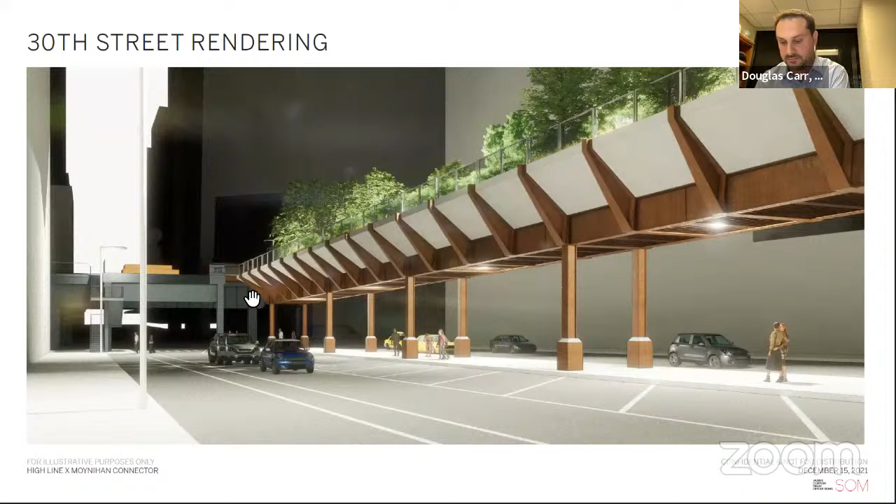So the next slide, some of this was the concern to address the greenery. As I mentioned previously, I think physical limitations, the idea of trees was discussed, but given the utilities in the subsurface, the low canopy on the elevated walkway surface, and the lack of light, this area will not support lush mature plantings.

So we started to pivot to another direction to see what could we include, something that was a flexible solution that would enhance the experience along here and also provide a level of flexibility as this connection and the street level experience evolves over time, to also include future improvements connected with the Port Authority bus terminal improvements and renovations, which will have an impact on the existing curb that we will have in day one.

So the solution we've come up with is planters. We also understood that there was a request and a general programmatic initiative for integrated lighting and something to give it an architectural perspective. So we specifically looked at planters with integrated lighting solutions.

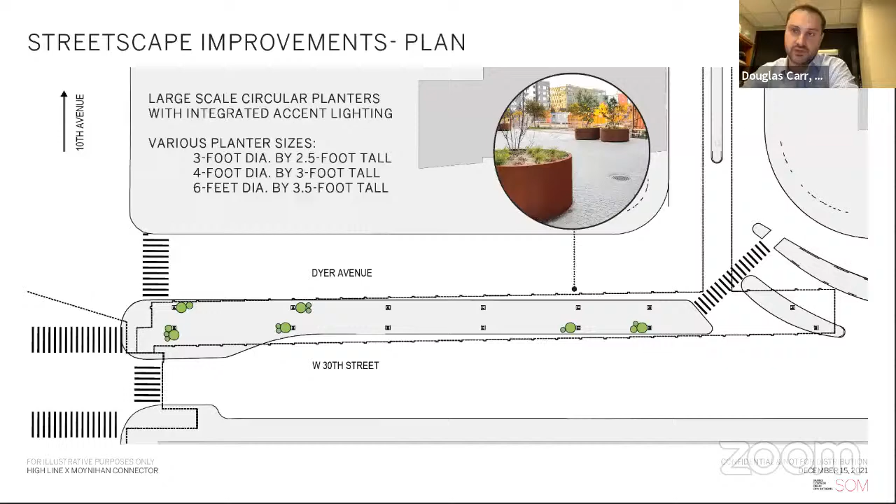And if you can switch to the next slide, the day 2 condition. So as we are planning, we also understood from the Port Authority their day 2 improvements for their Port Authority land. The connector, as a reminder, is being built on and over Port Authority land. So we have done this in a way that's compatible with current iterations of the Port Authority reconfiguration to support the Port Authority bus terminal.

So I think importantly, this solution is flexible enough that these planters can move if and as necessary with the future reconfiguration of the Port Authority layouts and design.

We can go to the next slide. A little bit more in terms of the options. So we've gotten as far as speccing certain information regarding the planters and vetting the vendors, fabricators, and quality of these planters. As I mentioned, they can come in various materials. They will also come available with an integrated water tank to minimize effort and maintenance for these planters.

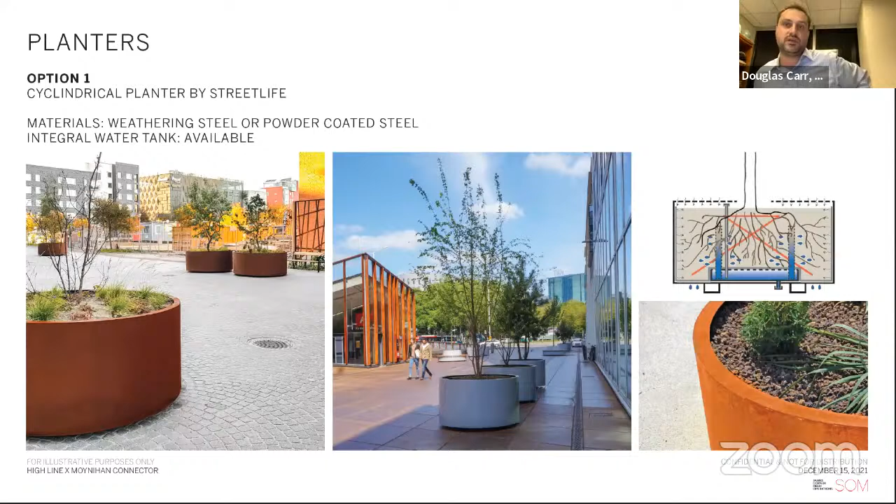And then we can go to option 2, next slide. These are still using steel, different material, different treatment for a visual aspect, but regardless of which version we go with, we have looked into an integrated water tank which would make the overall plant maintenance more manageable. Next slide.

This is a little bit more on the lighting and some of the options. On the left, option 1 you can see is integrated at the rim. There are options where we can incorporate uplighting into some of the plantings, and option 2 has LED strips at the bottom of the rims and inclusive of uplighting in the planters as well.

I believe that is our final slide. So we're happy to entertain any questions or comments or any discussion.

Yeah, I'll take care of that. Members of the committee, what's... David has his hand up.

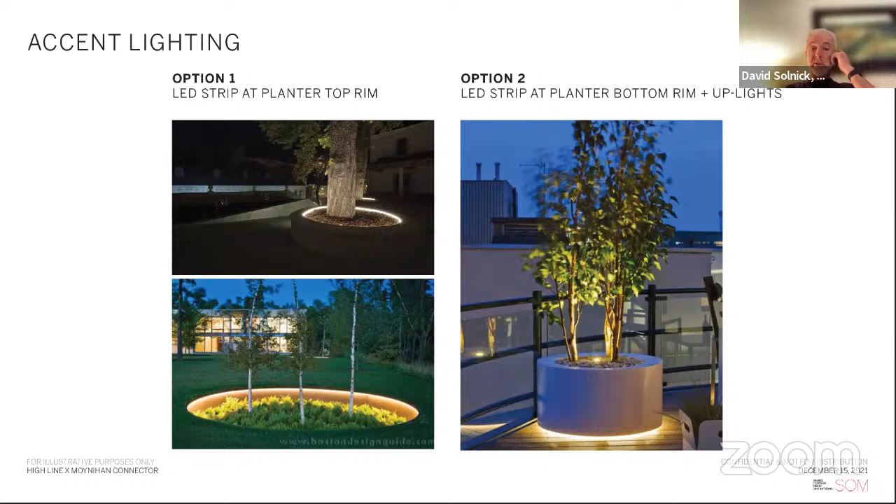My first reaction is these look like some great options, but I'm not sure what options... I don't really know how to evaluate it because I don't know what options you're going to choose, or how many of the planters are going to actually have this lighting or that. You've just given us a list of possibilities, but I think we're looking for a design to know what you're actually going to do.

Understood, that's where we're at, David, in terms of our design. I'm not sure if there's a specific question in there. Is it which option do we prefer, or do all of them come with lighting? I think the answer to both of those is yes, all of them can be integrated with lighting. I think we are deciding as a project team, probably leaning towards an architectural similarity on the weathering steel and the Corten option, but we wanted to convey that there is optionality.

I think the upper is all Corten steel, so it'd be fine to have it be Corten steel, but are you planning all of those? Will all of the planters have lighting in them? Yes, that is our intention. Okay.

Anyone else? Okay, I have a fair amount of questions. Could you go back to the beginning, show the beginning again? Yeah, and show the next one, next.

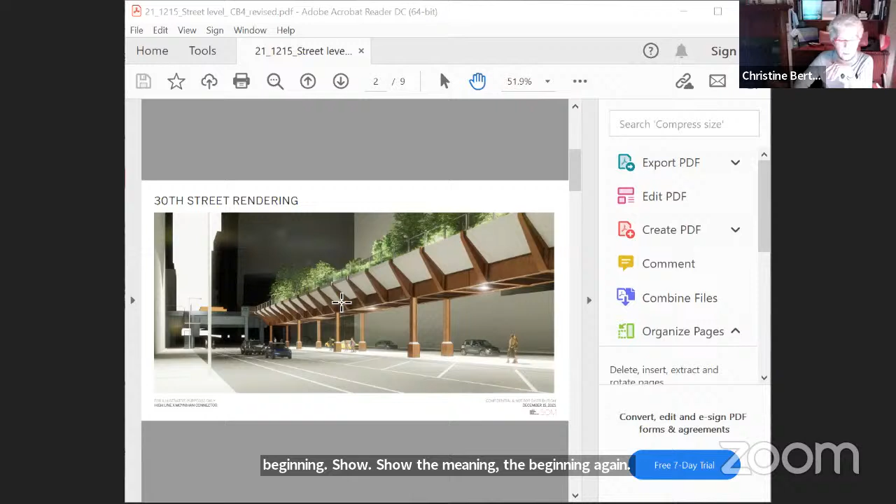Okay, so the first thing you said is we have to take into account the traffic needs for the lighting. So bottom line, what I'm saying is that the lighting issue has not been addressed to my understanding. There is no traffic need for lighting because today you have lights on that segment on both sides, on Dyer Avenue and on 30th Street, which is satisfactory.

And then for Dyer, they are going to be on the north sidewalk. What these lights are doing is providing the DOT specified fixtures. We spent a lot of time coordinating. But we don't need the DOT for that because there is not a requirement. We do need that, it's a pedestrian walkway. No, it's providing street lighting on the north and the south.

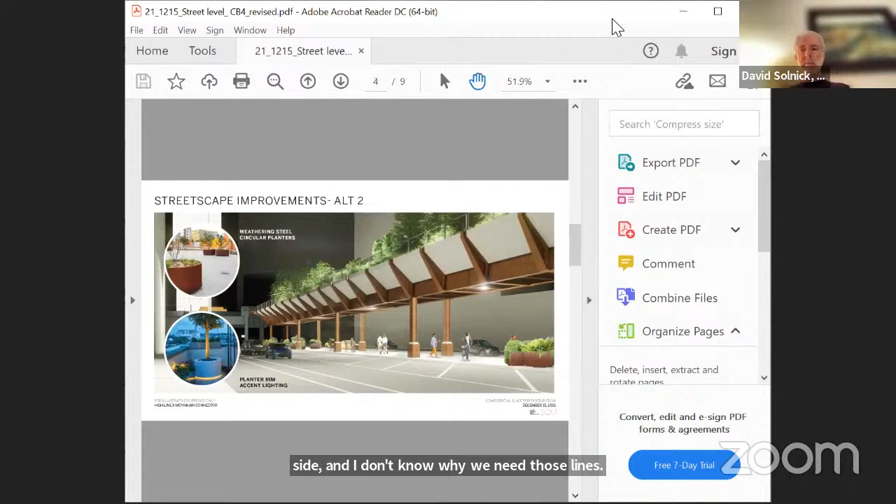Could we go to the plan, because I'm really confused about the existing lighting and what's being removed, and could we go to the plan and have somebody point to exactly what you guys are talking about?

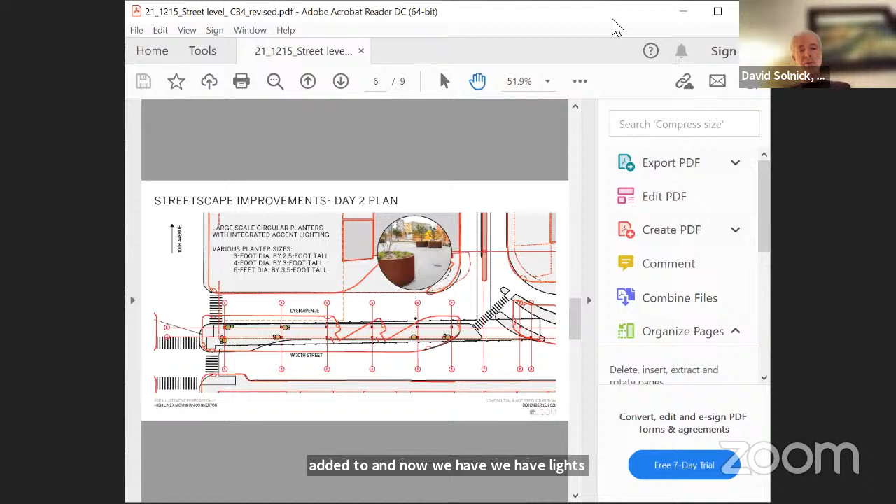We don't have a plan with the existing lighting, right? No, we do not have that. But on this plan, can you say, okay, we have lights over here and these are being removed, or these are being added, and now we have lights over here that are being removed? Can you, even just by pointing, make it completely clear? You can go to the previous plan.

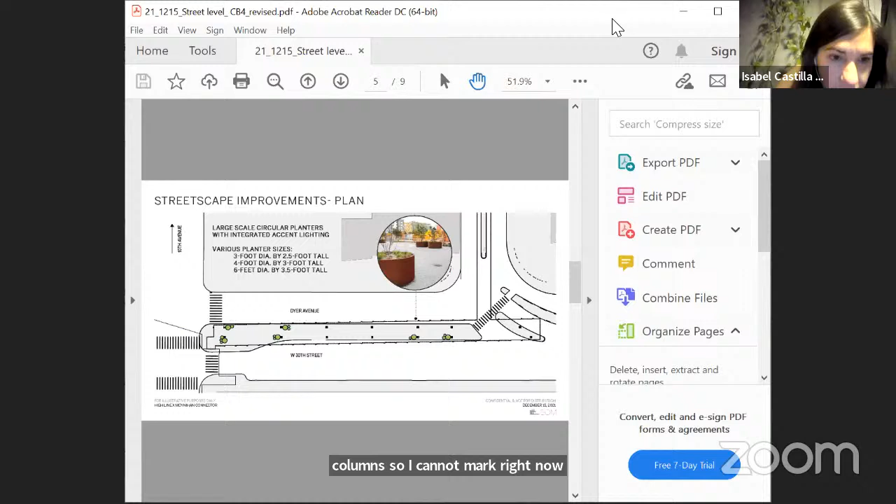I think it's going to be a little bit clearer. Currently there's a number of street light posts located more or less in between the columns. I cannot mark right now, but if you see the squares, there's a series of light posts that illuminate the roadway, currently located between those squares, for the proposed connector bridge.

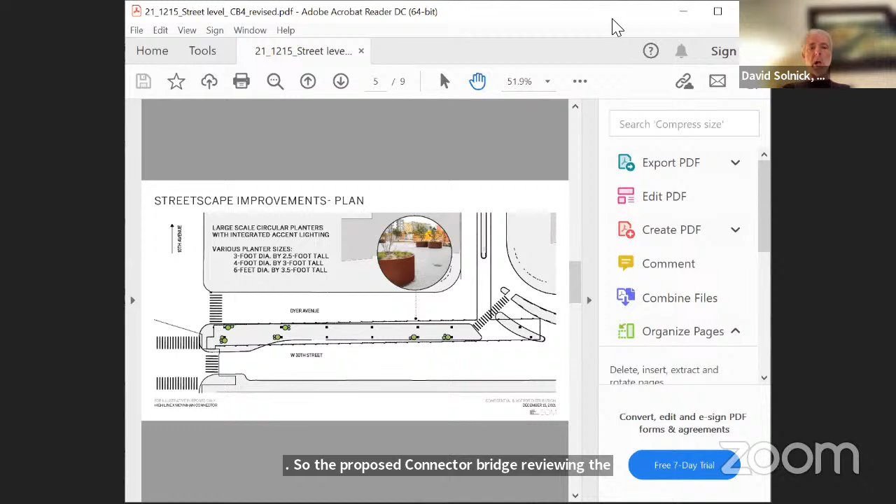The squares being the columns, is that correct? The columns, yeah. I cannot annotate, so I apologize, I'm trying to describe it in the best way possible. But that's where the current light posts are located that illuminate the streets, both Dyer Avenue and 30th Street.

By locating the connector above, we need to substitute those lights with something equivalent, which are the lights being shown on the rendering situated underneath the bridge.

And are those lights supposed to be lighting Dyer Avenue as well as the pedestrian way underneath? They're supposed to be illuminating Dyer Avenue, 30th Street, and the pedestrian way. All of them.

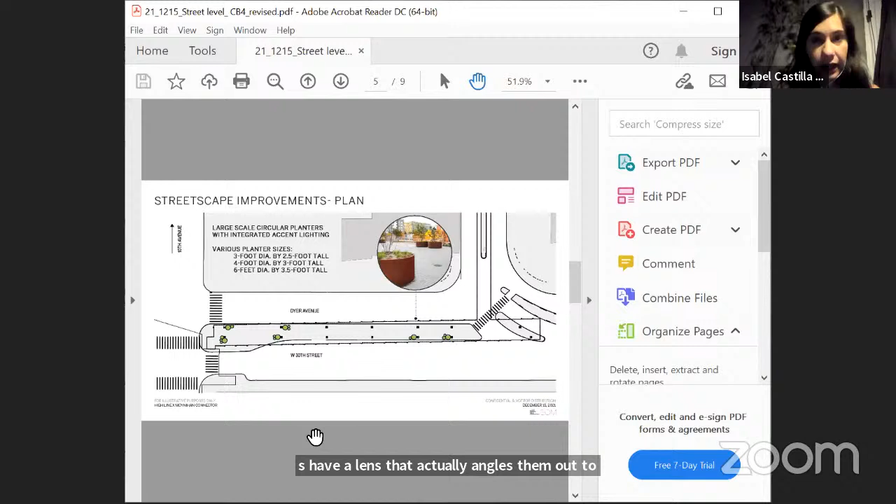So those down lights are intended to illuminate the street Dyer Avenue? Yes. So the lights have a lens that actually angles them out to Dyer Avenue. So what ends up happening is you get higher light levels on the street, which meet all the vehicle requirements, and lower light levels on the sidewalk due to that angling of the light.

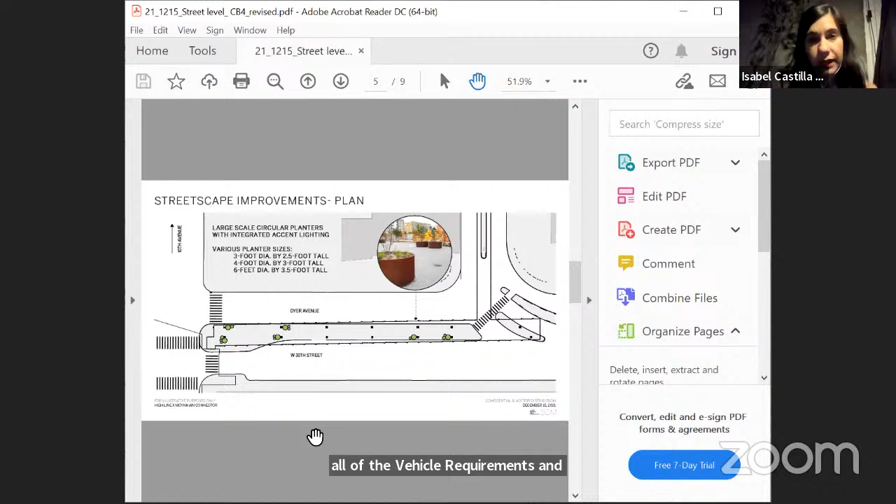So the fixtures are baffled, essentially. Yes. So then it's not going to look like the rendering, because the rendering just shows a simple downlight going straight down. There's no baffling shown in that rendering.

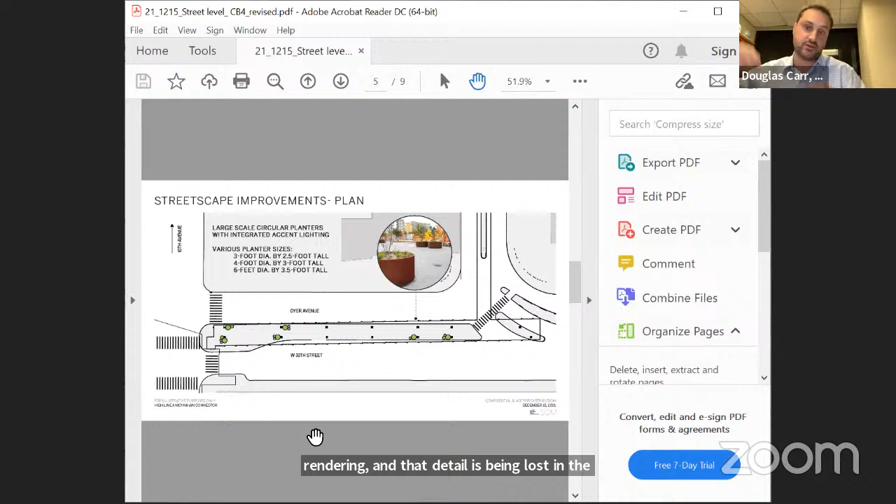I think that's potentially the limitation of the rendering, and that detail is being lost, but the description is accurate. That's a pretty big difference. I had no idea that you were trying to direct that light towards the street.

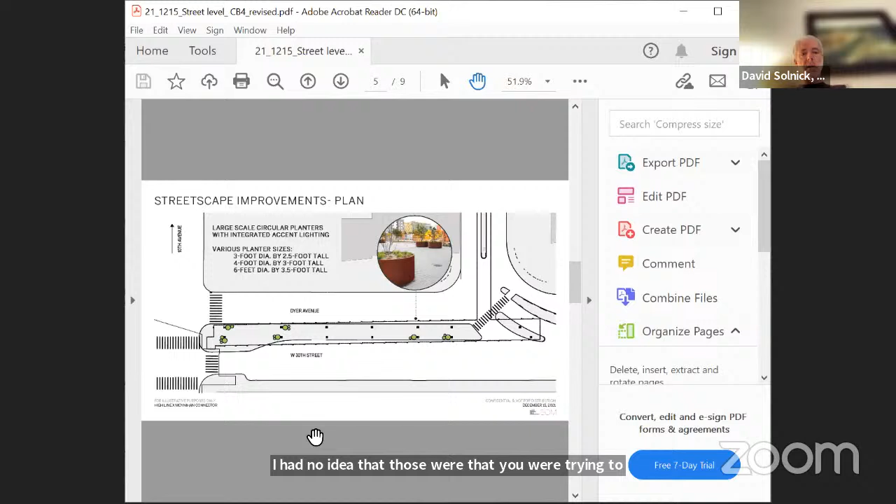Can you show us back the drawing with the lights? Can you also make it full screen, please?

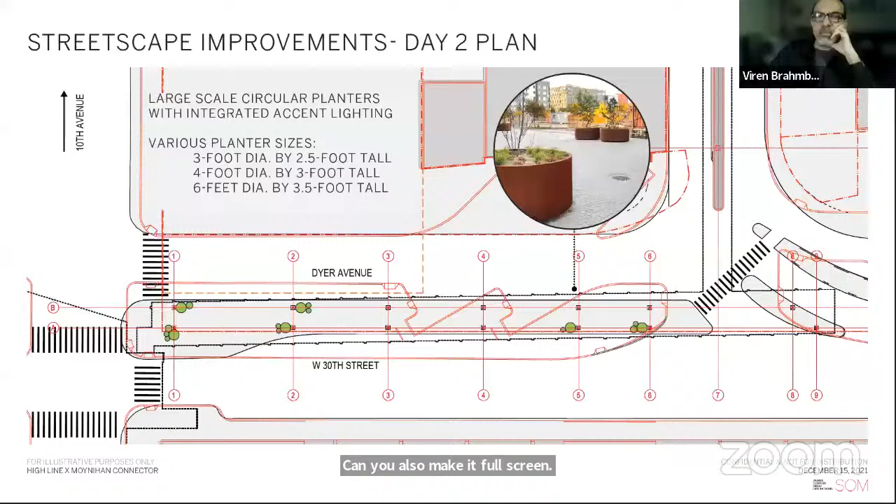Where do we show the lights? I think it's the previous page 3, I believe.

That one. Right. So you see, as far as I'm concerned, if you want light for the cars, you can install them on this vertical part of the High Line.

What are you suggesting, Christine? The vertical parts? I'm not sure I understand. If you take the part of the High Line which is supporting the sort of trestle, the flying trestle coming out from the base of the structure, and then the Corten angle along the side, right? Is that what you're referring to? Yeah. So if that's what you want, I think I understand.

What you want is light on the street, you put them there on the street. And put the light underneath it for the pedestrians.

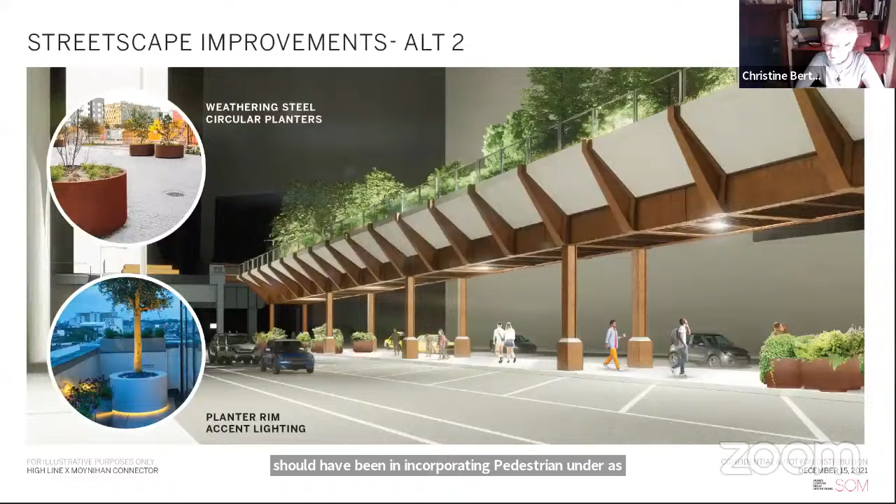Yeah, but if the design element, which should have been incorporating pedestrian underneath, has never done that, you guys need to go back to the drawing board. From day one, we told you the design does not take into account what happens underneath, and that has been the deficiency in this design. So now we've got to find a way to fix it. There are so many designers, we've got to find a way to fix it.

So I can appreciate that, Christine. I do think, to underscore what the project is doing, I don't want that to be lost here. And it seems like at times it does.

This represents a giant improvement in the neighborhood, and there are two areas where you're providing the pedestrian improvement. There is a lot of focus on the upper portions, and we have refocused our efforts on the lower portions. I think we're confident this is a very substantial improvement for the neighborhood and for pedestrian flow, both above and below the structure.

Below it. Sorry, we live here, so we know what's an improvement for the neighborhood.

Viren, you have your hand raised. Yeah, I just want to chime in. There's a couple of things here. The question of materiality that Douglas is raising is valid in more ways than one. The moment you start putting lighting on the brackets or between the brackets, you have conduits and other materials showing up, and that might become a visual anomaly that we might not like. So it might sound okay in principle, but it could actually create an aesthetic problem we're not seeing clearly.

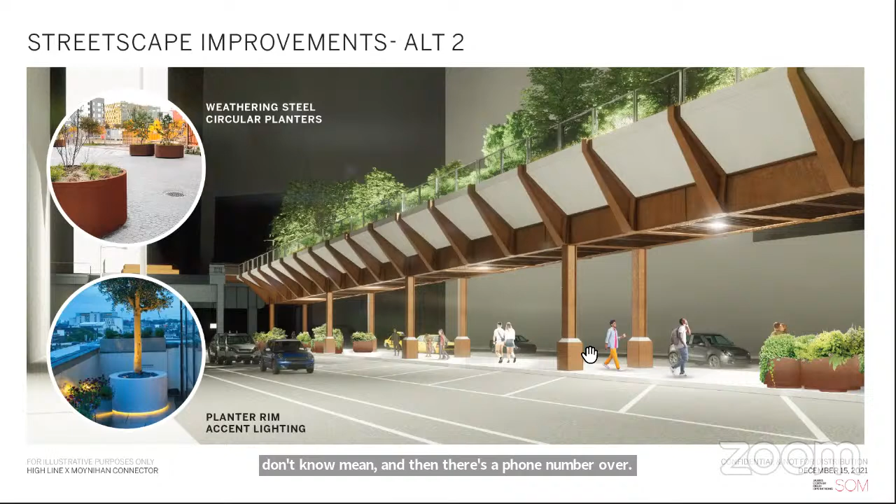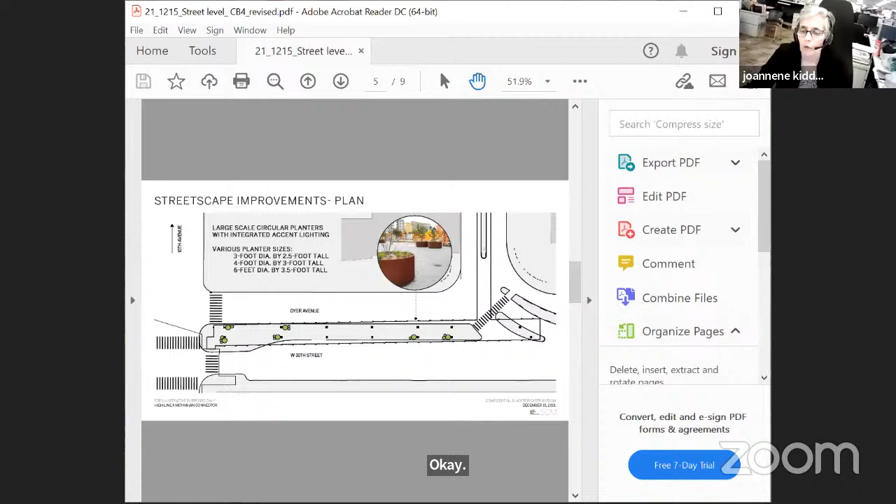Hi everyone, I'm actually from New York City DOT to speak on the second project. I didn't have any association with this project. Oh okay, we'll get to you for the next project. Sorry if I clicked on the wrong thing. Oh, you want us to talk about life with you?

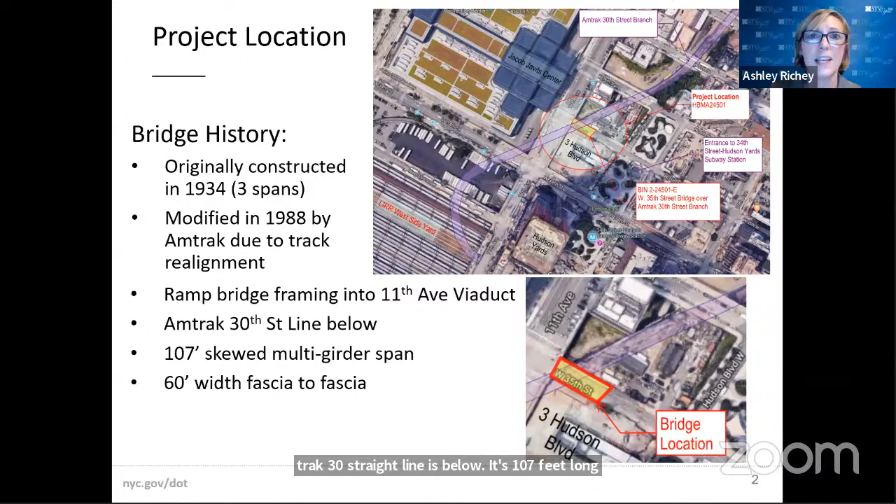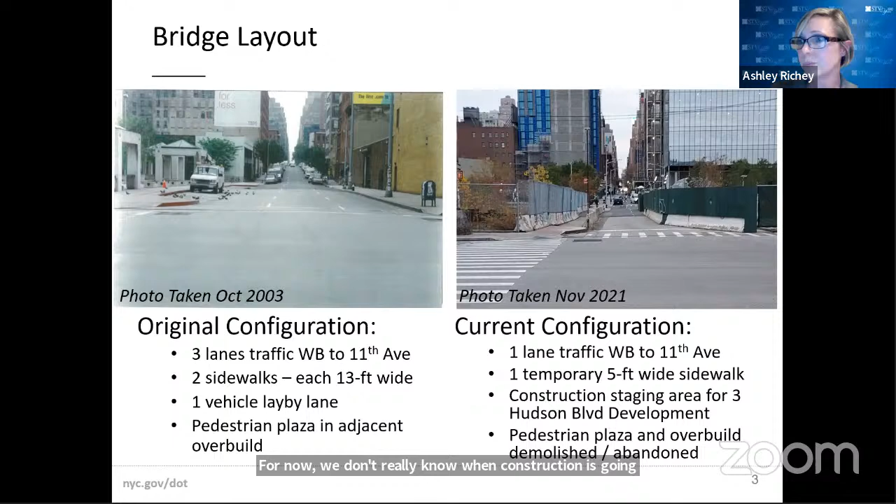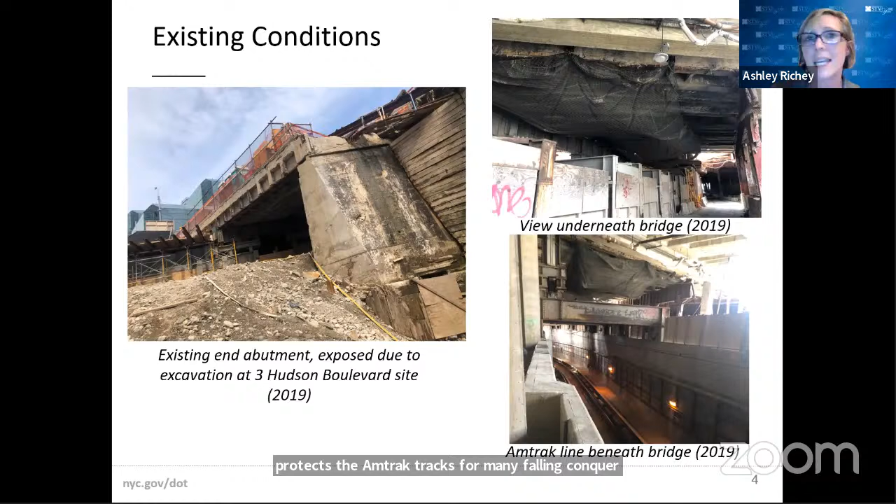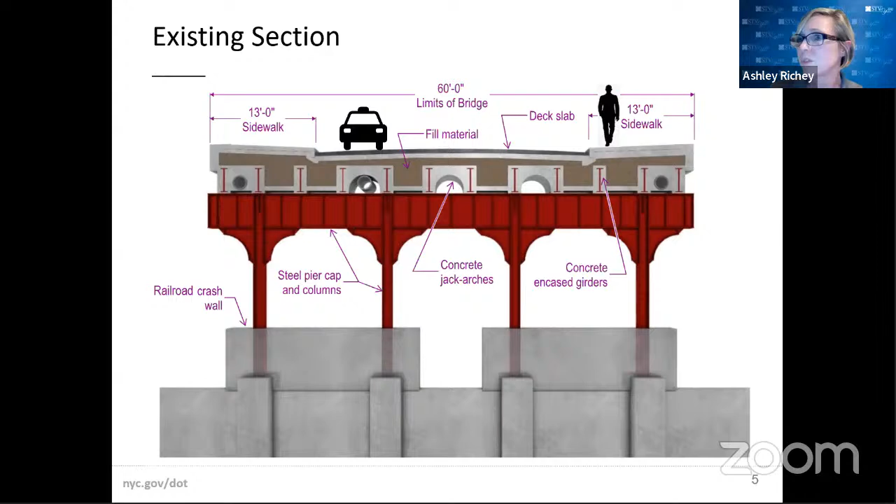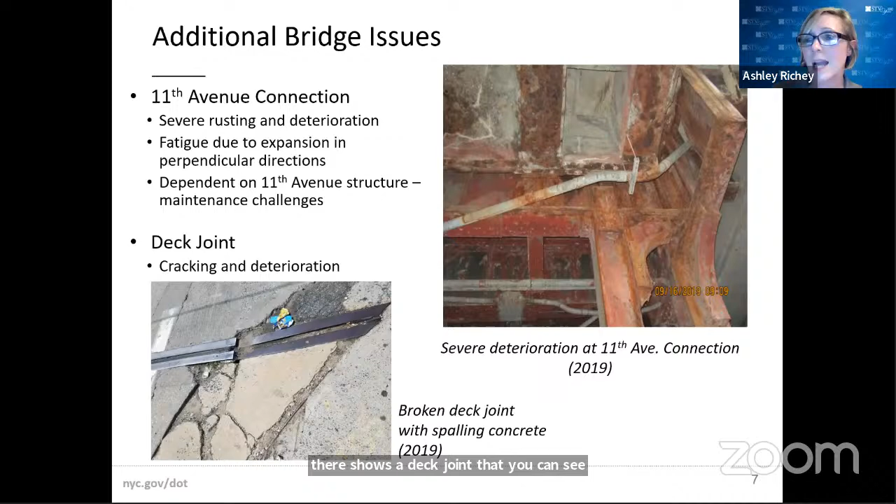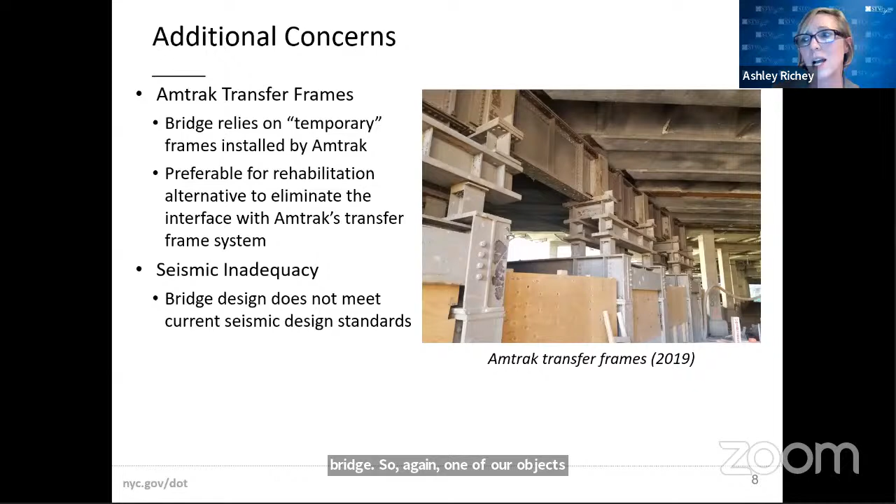The Amtrak modification that I talked about earlier, the one in 1998, is shown here from underneath. These are so-called transfer frames. It was supposed to be temporary, but it was installed and it's still there supporting this bridge. Again, one of our objectives here was to eliminate the dependence on these transfer frames put in by Amtrak.

So just a summary of our project objectives: we're looking for a bridge service life of 50 or more years. We want to minimize impacts to Amtrak below, and of course minimize impacts to pedestrians and vehicles that use the bridge and the area. It's grown so much with the Hudson Yards development, so the changing traffic patterns due to these large scale developments is certainly something we're taking into account.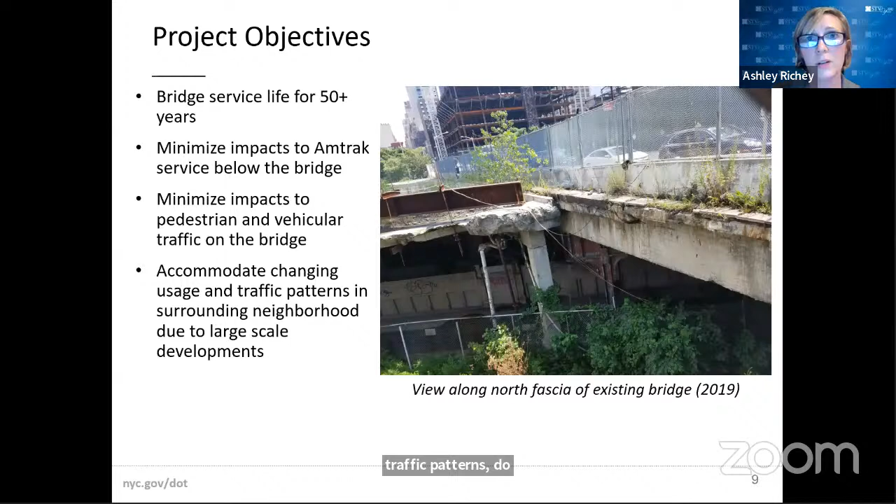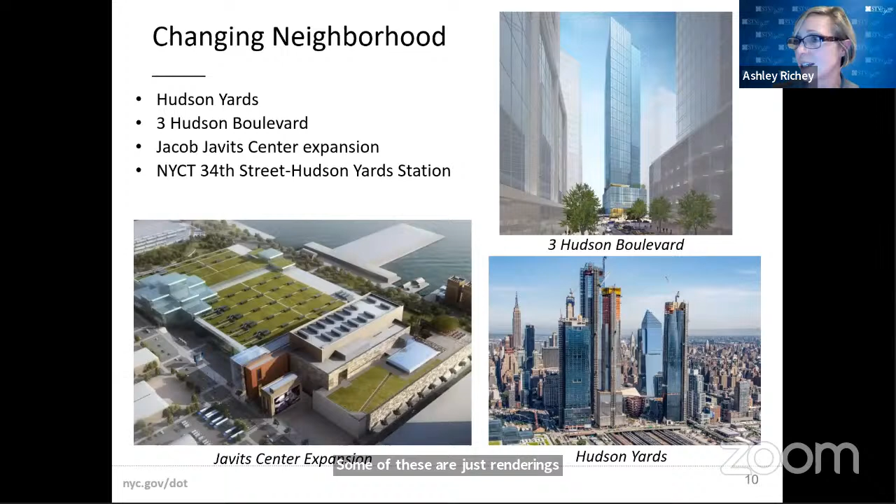Here's some renderings. I'm assuming you all live there, so you know how the neighborhood is changing. Some of these are just renderings of some of the developments going on: Hudson Yards, 3 Hudson Boulevard, and the Javits Center expansion.

So I'll walk you through some of our alternatives. In the preliminary design phase, we go through our design report. We look at a range of alternatives to meet those objectives that I just went over. We look at traffic, we collect environmental samples, and we look across all disciplines to try to minimize impacts while coming up with an alternative that meets those objectives.

So we always start with a no-build alternative. In this case, doing nothing with a no-build was really just not an option, but everything gets checked against a no-build, so it's always in the mix. Number 2, we looked at a deck replacement, but given the current condition of the deck and the ongoing construction that's occupying half of the bridge at the moment, it really didn't make sense to just replace the deck.

So we started looking at superstructure replacement, and there were some sub-options there. Because it's currently a 3-span structure, we looked at another 3-span structure, kind of an in-kind replacement of the superstructure. Then we moved away from that, found that not to be feasible because it still depends on the Amtrak transfer frames. So then we said, well, what if we get rid of the Amtrak transfer frames at Pier 2 and we make it a 2-span structure? But then we're increasing the loading on Pier 1, which would require a significant retrofit. So then we said, well, what if we go single span and get rid of Pier 1 and Pier 2? But then it's too long of a span and it puts too much load on the existing 11th Avenue connection. So that too would require a significant retrofit.

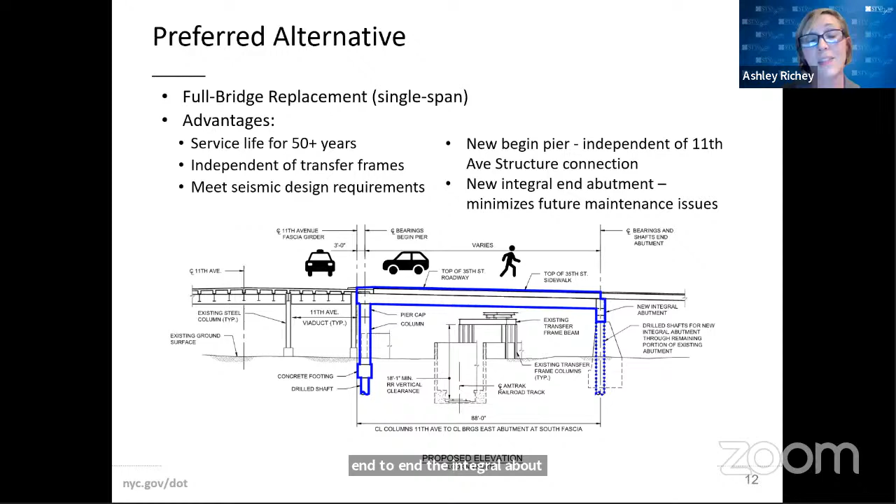Touching on other advantages we've talked about: the 50-year service life we would get, we would address seismic, and there would be a new integral abutment at the other end. The integral abutment eliminates the joint, thereby eliminating future maintenance issues, or at least minimizing them.

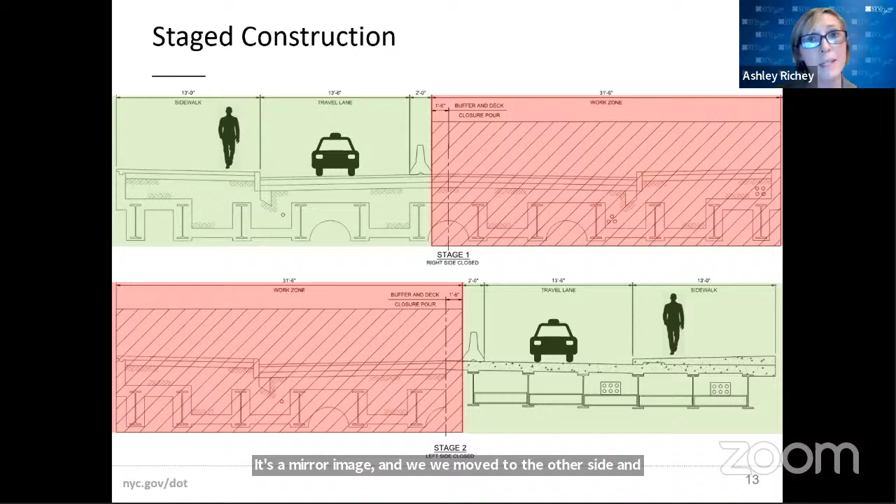So the construction would look a lot like it does now, being staged for that tower that's under construction. We too would stage construction and build half at a time, and that's what this graphic depicts. So we would keep one lane open, much like how it's being used now, with one sidewalk open on one side. While that's open, we're working on the other side, and then we switch. Stage 2 is a mirror image, and we move to the other side. So it can be done in 2 stages.

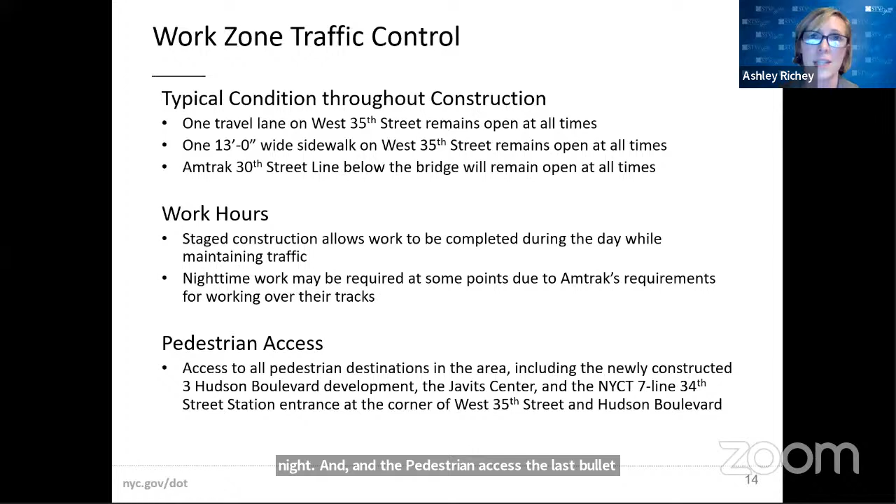So work zone traffic control - like I mentioned, we'd always have one travel lane open, we'd always have one sidewalk open, and Amtrak would be moving below. Work hours - we are still in the preliminary design phase, but certainly we would work with OCMC to determine what those work hours would be. We imagine it would be during the day, maintaining travel and pedestrian access. There may be some nighttime work required, coordinated with Amtrak, and typically those working hour windows are a bit smaller, but we do anticipate some work done at night. The pedestrian access bullet is kind of a repeat, but just to reinforce that we would keep pedestrian access open during construction.

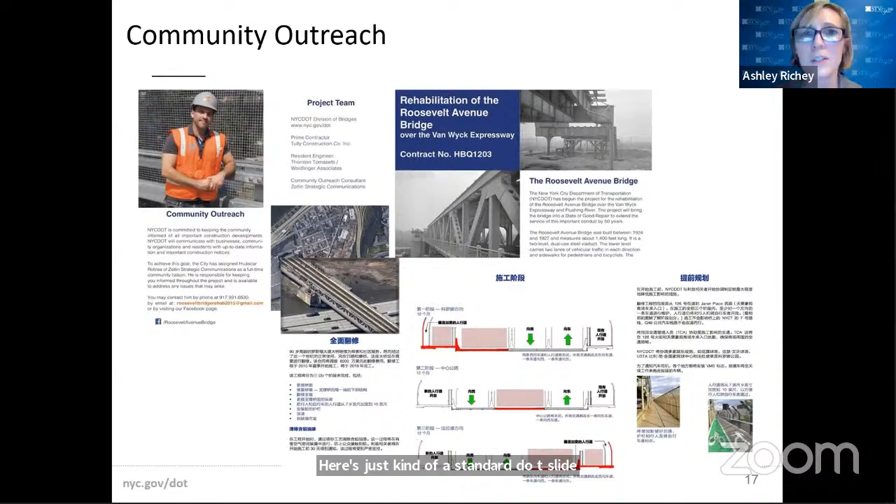Here's just kind of a standard DOT slide, showing that we can produce materials in multiple languages and multiple platforms.

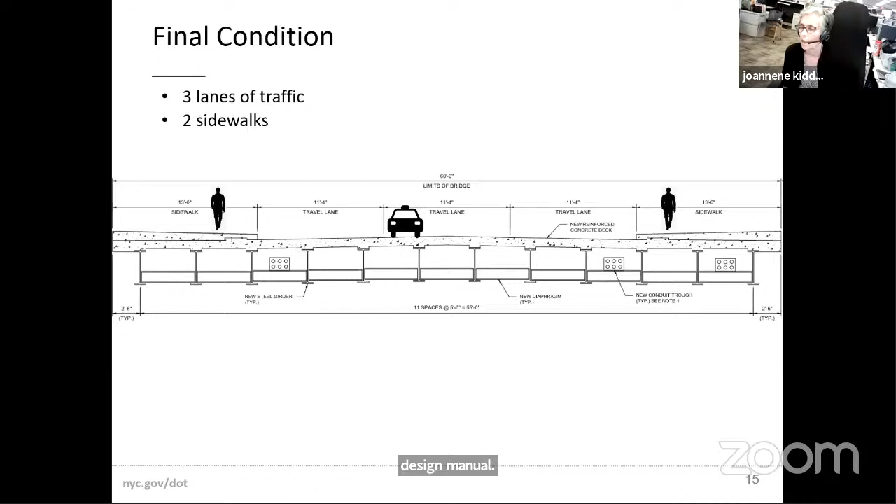I'm going to go back to David. So if I could, I hear everything you're saying, and we're taking all this information with us, but I do need to reaffirm that this is a bridge structure. It is experienced by the community as a street—I know many people may not even realize there's a bridge there over Amtrak—but it is a bridge structure, and we are required to conform to the New York State Bridge Design Manual and those other documents. That doesn't discount any of the comments you've made, but it is a bridge structure and it has to be referred to by us in that way.

Well, yeah, and you can build a bridge under it—like the bridge on 30th Street, like Manhattan West. What's on top of it is different from the bridge itself. There are two different concepts here. What you are under is a bridge, and you should follow all those rules. But what you build on top is a street, and it should follow those rules. So I don't think we're disagreeing.

David, can I just add one thing regarding that? I just want to note, we will go back to our traffic data, but I believe there's one lane with parking on each side—that's the condition up to Hudson Boulevard. This has been under construction with that tower there for a while, but I believe between Hudson Boulevard and 11th Avenue we need more than one travel lane. There probably is the potential to widen sidewalks, though.

How do you know you need that? For traffic—how many volumes we need to process to 11th Avenue. If 35th Street was narrow before, you had the neck-down, the bottleneck, and therefore you can't need more after it than before. Well, potentially with the development in the area and the projected traffic, but we will look back at that. We have already established that.

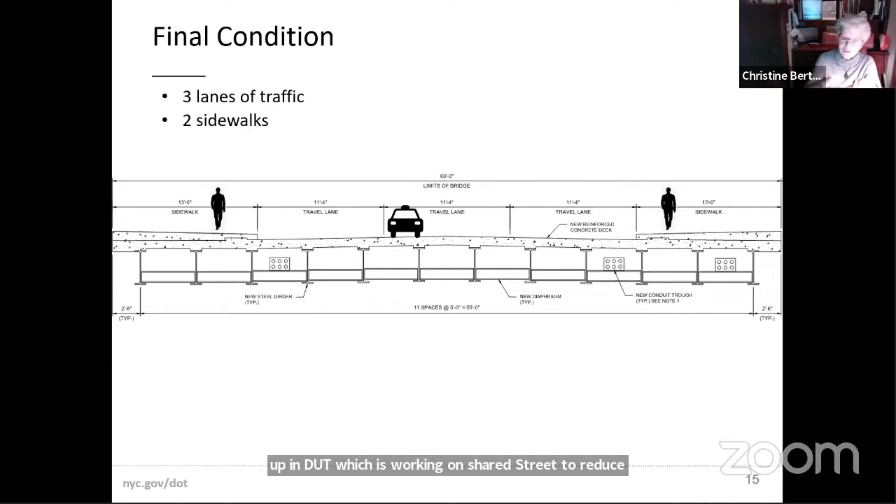We have a group in DOT working on Shared Streets to reduce traffic to 5 miles per hour, and this is the street just across from here, so we can't have two design guidelines for the neighborhood. The traffic is not the driver in this neighborhood—the pedestrians are. It's a park, pedestrians, and commuting by transit. This is not about traffic.

Okay, David. What I'm sensing from this presentation is that this was basically given to these folks as an engineering problem, strictly an engineering problem. Rebuild the bridge, and that's exactly what they've done. The way this presentation was created, shown with all the pictures from underneath and the language, it's a structural engineering presentation.

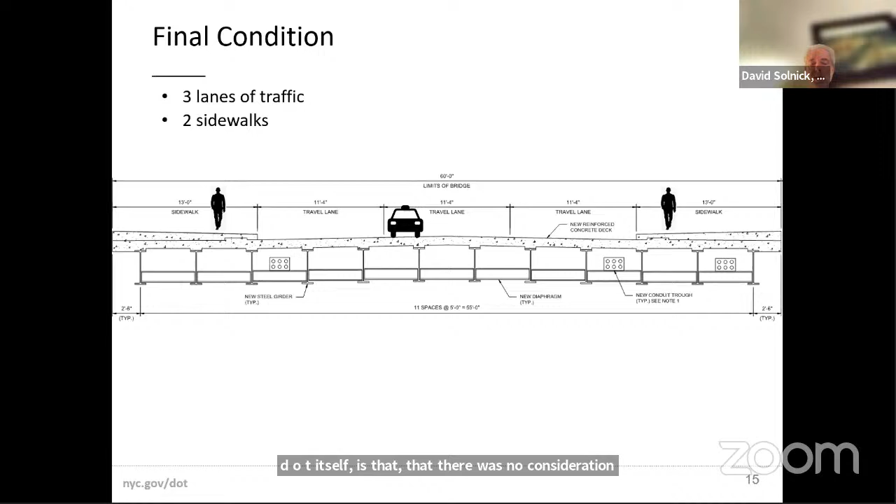What's disturbing to me is how apparently siloed the DOT itself is, that there was no consideration of first creating a program for the bridge. Obviously the first step would be, what is the need, how wide does this bridge actually need to be? How many lanes of traffic does it need? How much, looking at future development, how many pedestrians and how many cars will be in that future development. That should have been the very first step. Instead, the bridge was designed, brought to the community board, and then the community board is doing what should have been done internally within DOT before the structural engineers ever saw this project. That is very unsettling and upsetting. There is something wrong with your process, that the community board is pointing out that you need a program for a project before you start the project. It shouldn't be the community board that points that out. DOT should know that and should be sequencing this project in the proper way.

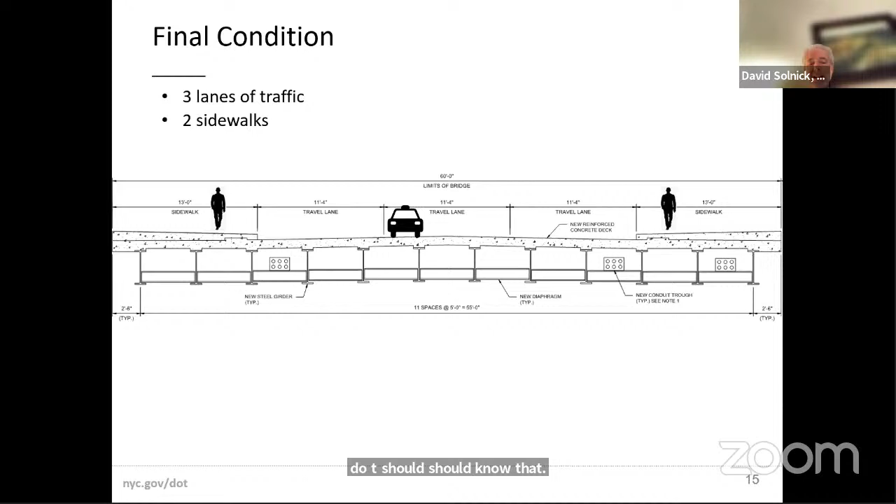Okay, Viren. I just want to reiterate my same point, let's be very clear. Your slide says 3 lanes of traffic, and we're talking about a single lane of traffic as is the existing condition. And the parking is criminal, so there's no need for the parking to continue. I think pinching the two ends of the bridge would be the way to go, but please reconfirm that it's going to be a single lane of traffic. Yeah, and widen sidewalks.

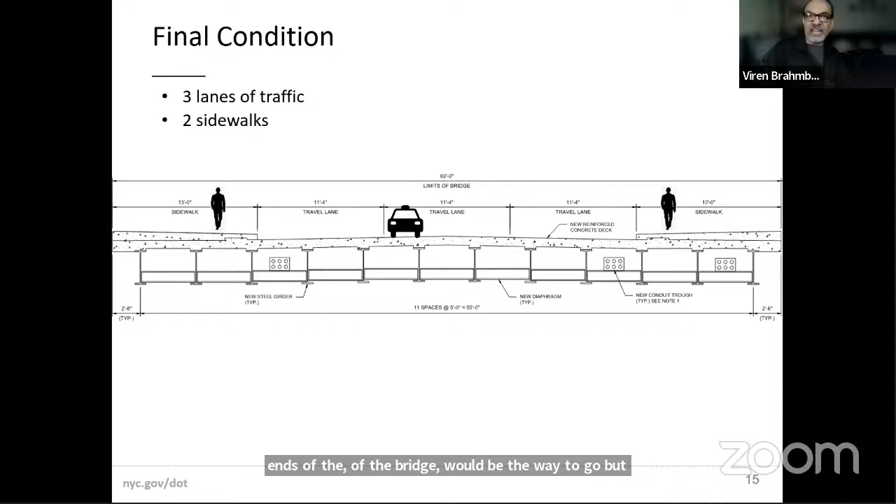And then, is that Rob? You had something to say, Rob? No, I was just asking, do you know where Manhattan West is, where they're building that new tower? Right where 30th Street is and 9th Avenue. I was wondering, is that the same kind of road where there's a bridge underneath of it, you know, how they're replacing that entire bridge? I'm not sure this is the same kind of road. Never mind, thank you. Okay, do we have anybody in the public, Janine? The committee? Anybody else? I mean, I've consumed all the air in the room. I'm sorry.

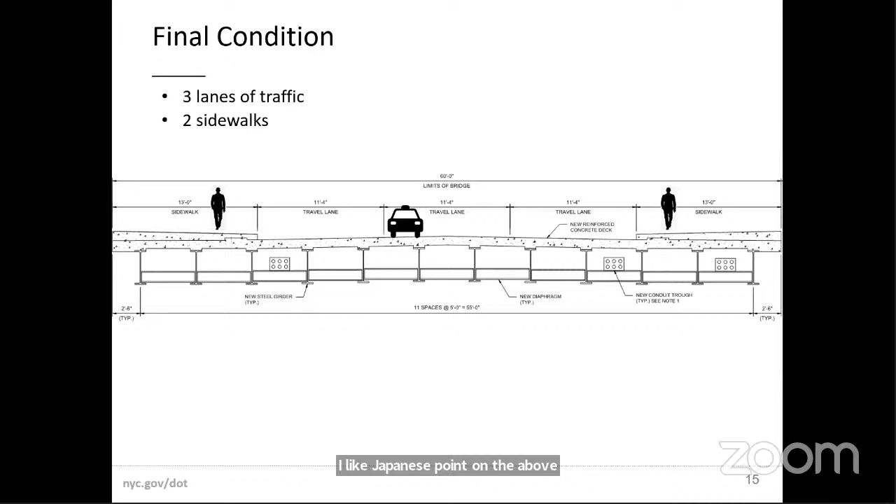I like Jeffrey's point about there's so much for cars and nothing for the pedestrians and stuff, so I agree with Jeffrey on that. So, Janine, anybody in the public? No, I don't see any more hands up.

Okay, all right, so I guess I'm going to try to summarize what I heard. I think your structural approach is obviously probably very good, I don't feel we are competent to discuss that, but generally we are all going to say when you rebuild the street on top, you need to rebuild it to the standards we are using in the district and around the park, increase the pedestrian space as much as possible, reduce parking space, reduce travel lane width, have only one travel lane. The objective at the end is that there is a place where it's easy to cross the street for pedestrians, it's safe, and it accommodates a lot of pedestrians because they'll be coming out of these humongous towers, right? And we are working with other divisions of the DOT to achieve the same thing on all the other streets, so I think it would make sense that we try to achieve that here.

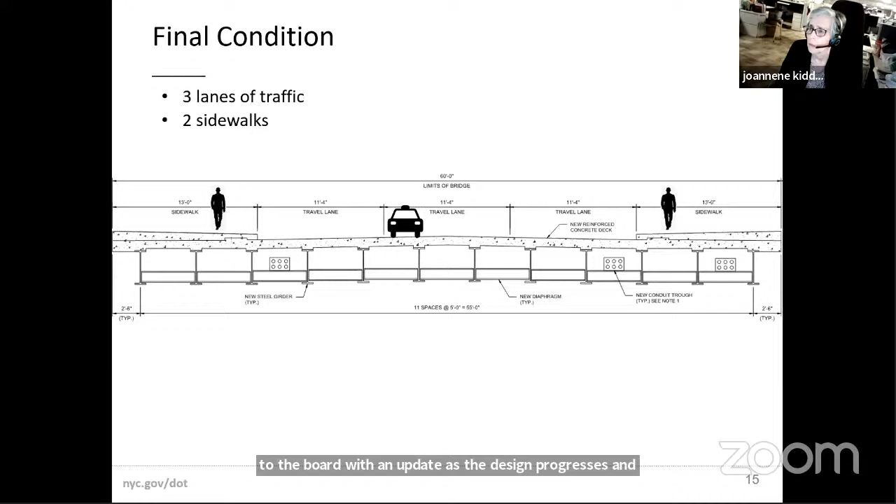So I thank you all for the input. This is exactly why we come to the community board at the milestones throughout the development of the project. You know the community better than anyone, so we will take back all of the issues you've identified tonight in terms of the parking, the lane widths, the width of the sidewalks, all of these points, and we will bring together our existing traffic data and traffic information and come back to the board with an update as the design progresses. We'll come back to you, we hope, with something that you feel meets the needs of the community. That's what we're here for. Thank you, so I made kind of a summary.

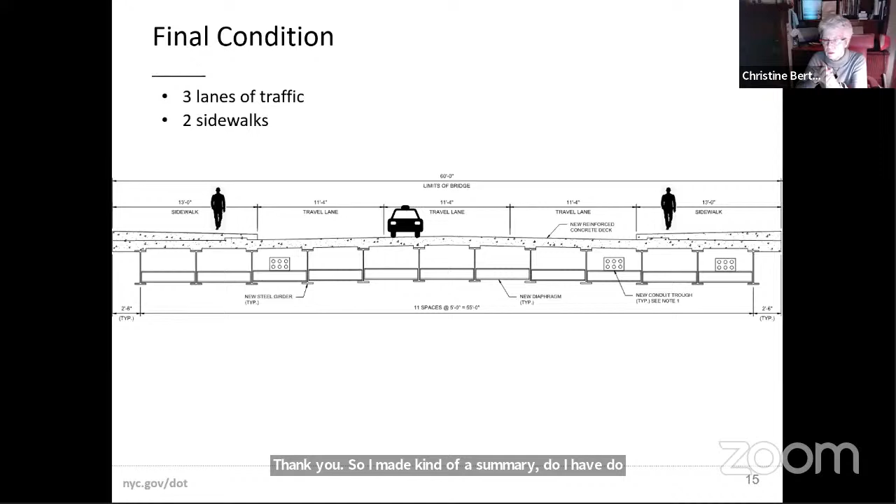Okay, well, thank you so much. It was really, we are very glad that you brought it in. Thank you. And I just thank my colleagues behind me at DOT for waiting through two presentations and for letting us go in ahead of you. Thank you, everybody. Thank you.

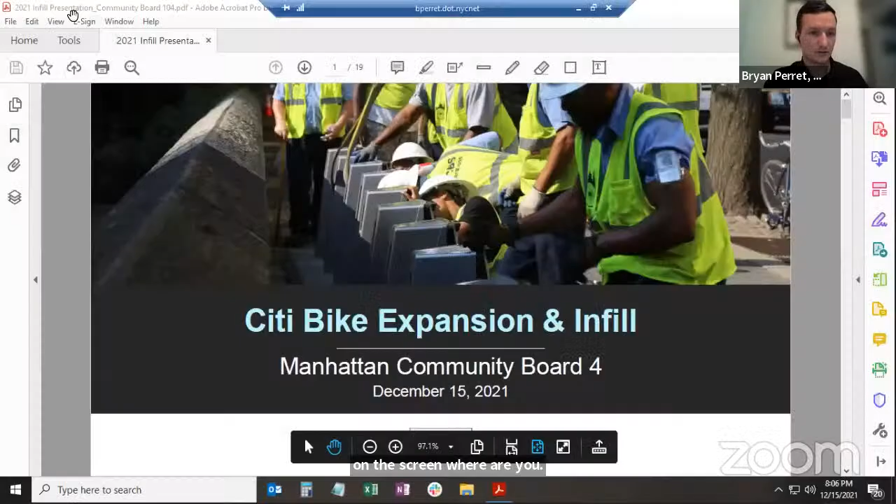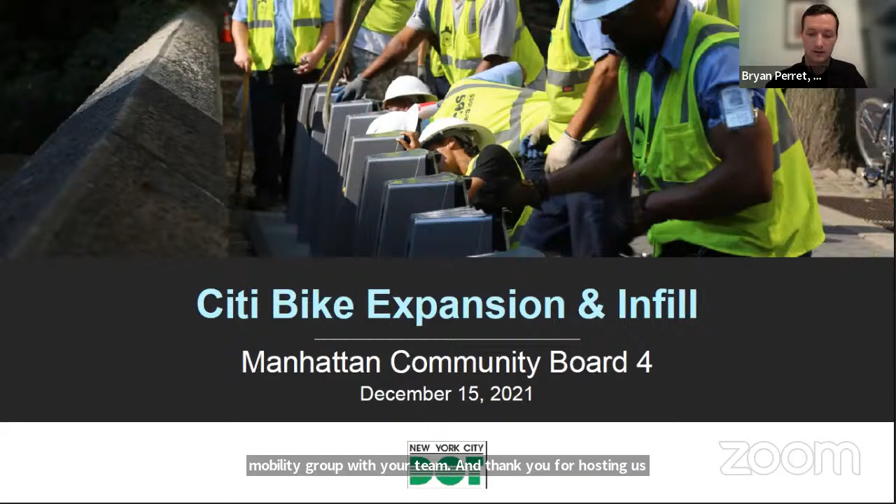Hi, I'm Bryan, operations manager with the Bike Share and Shared Mobility Group at DOT. Thank you for hosting us tonight. So we are here to give a quick overview about Citi Bike. We'll talk through our infill project, a little bit more on our enhanced data-driven planning process, and finally walk through our proposal for Citi Bike infill for Manhattan's Community Board 4.

Citi Bike is our city's bike share system. We've been operating since 2013. It's a 24-hour, 7-day-a-week system operated under a public-private partnership with our colleagues at Lyft, who are responsible for day-to-day operations and maintenance. Currently, no city funds are used to run the system; it's supported through revenue generated by membership and other rider fees.

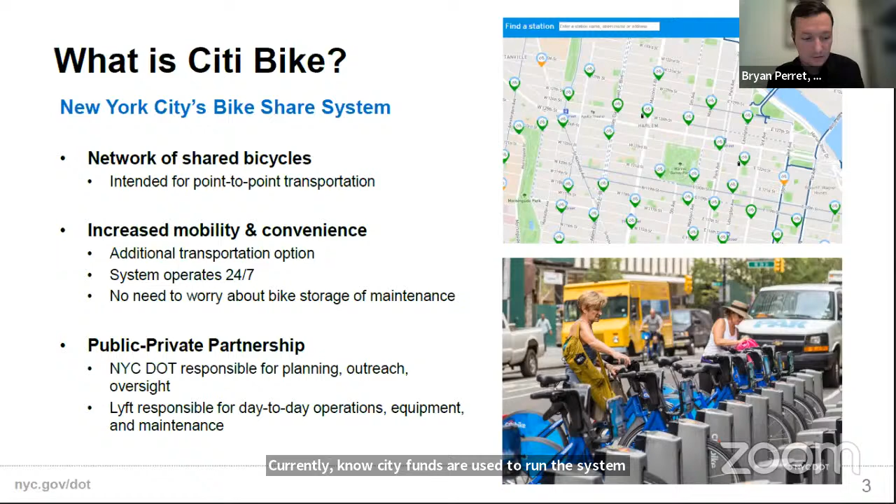To date, the system is 8 years old. We launched in 2013 in Manhattan and Brooklyn with 330 stations, increased again to 750 stations in 2017, and we're currently in the middle of our phase 3 expansion. Lyft acquired the program in 2019 and announced a major investment to bring the system to 70 square miles and 40,000 bikes. We're currently a 4-borough program and are about halfway through our phase 3 expansion.

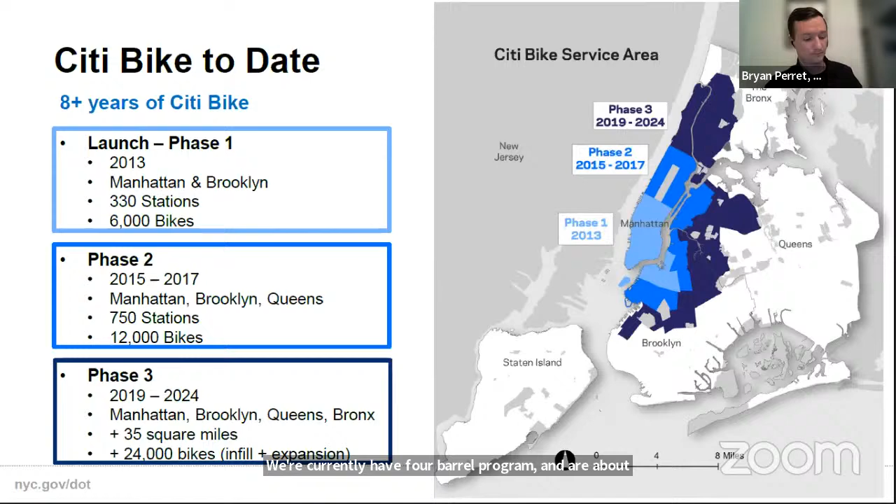The system to date is incredibly popular. We've had over 135 million trips to date. On our busiest days, we're regularly hitting 100,000 trips per day, that's about 5 trips per bike per day. Peak days earlier this summer were about 120,000 trips a day. And Citi Bike, unlike other transportation during the COVID-19 pandemic, really didn't drop off to the extent that other modes did—we were at about 95% of 2019 levels during the pandemic.

Next, we'll discuss our phase 3 program in a bit more detail. That consists of 2 distinct but linked projects: expansion and infill. Our phase 3 expansion is bringing Citi Bike to new parts of New York City and is going to double the geographic size of the system. Infill, represented by the gray area on this map, is adding additional capacity to the existing phase 1 and 2 service area, the densest part of the system. We anticipate all these installations will be completed by 2024.

So infill is essential for the functioning of the program. This is bringing capacity to the densest part of the system, and it really helps the system function. Rebalancing with a system this size just isn't enough to accommodate the increased demand and increased ridership as the system grows.

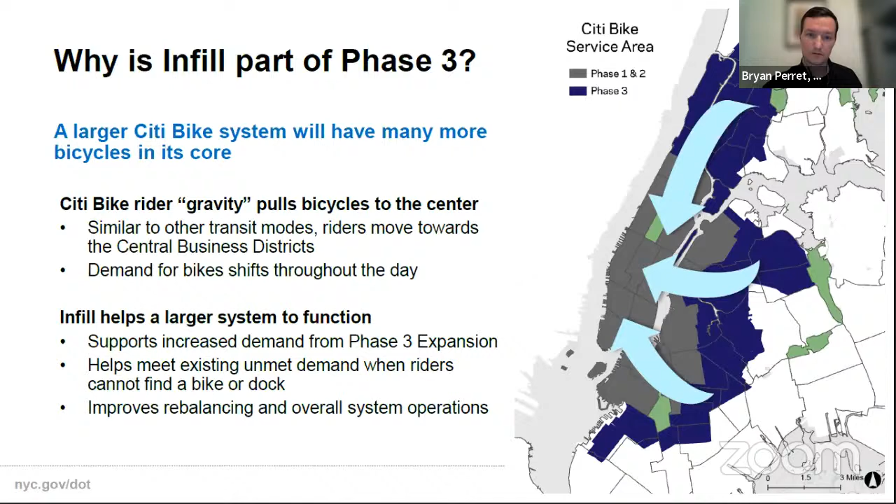Talking a little bit about our timeline and principles, we're installing 16,000 docks in our infill program over the next 4 years. We're about 35% of the way complete. Site selection for infill is driven by both demand and filling network gaps, and we'll discuss that more in depth in a minute. Infill has been a rolling, iterative process. We're currently installing in multiple boroughs at the same time.

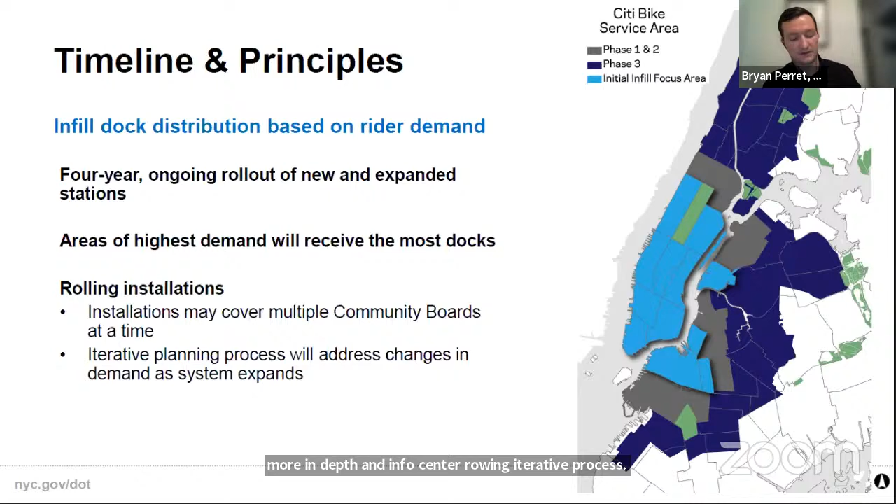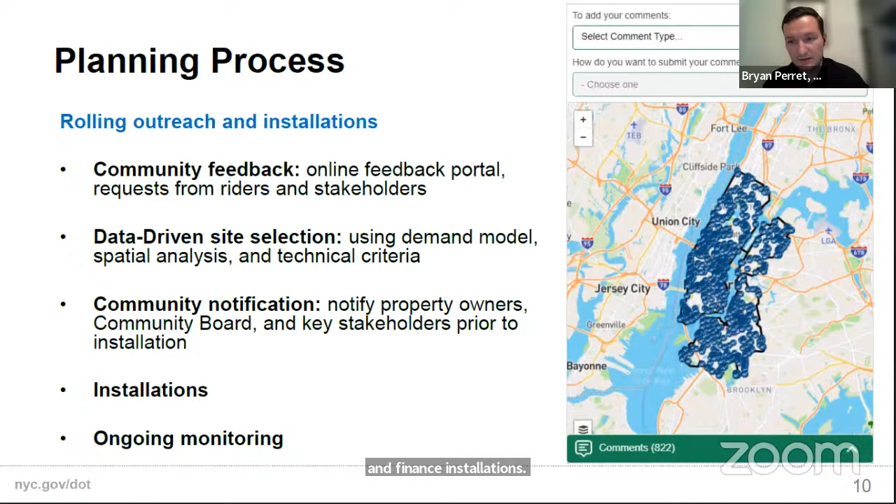Discussing our planning process, we combine a number of inputs to our station siting proposal. We use community feedback from an online portal, and a data-driven spatial analysis shows us the best places and appropriate sizes for stations to ensure that infill does its job. We work with our partners, the borough president's office and Lyft, to notify stakeholders in advance of installations. Then stations are installed and we continuously monitor them over time.

Specifically, let's talk next about our infill planning process. Our high-level infill goal is to improve the system by reducing instances where riders can't find a bike or a dock. To help with this, we've worked over the last year to create a model that looks at existing ridership patterns and identifies areas where we need to increase system capacity to meet rider demand. Looking at this map, you can see the entire phase 1 and 2 service area. There's pretty heavy demand in many parts, but the most intense demand is obviously in Manhattan, south of 60th Street.

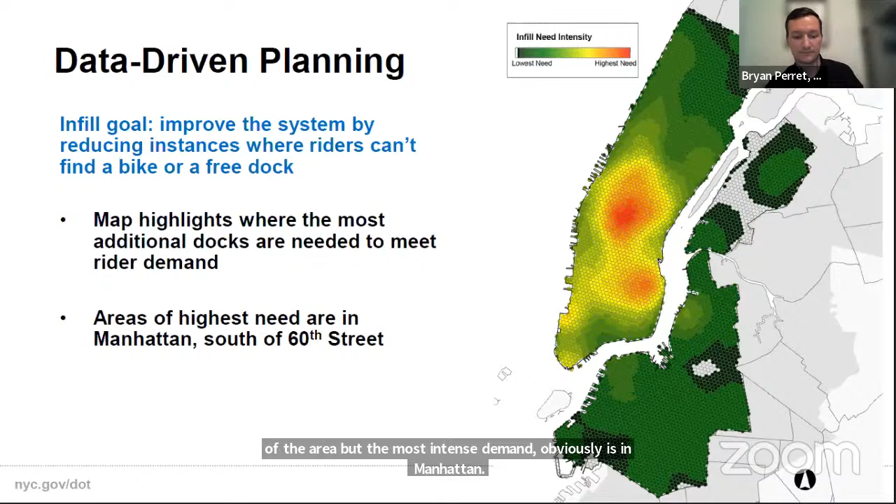Taking a deeper look into the community board level, you can see there's demand across the board. Some areas have a higher intensity of need. One of the limits of our model is it measures demand where there are currently existing stations. But as you know, there are some locations or some areas where stations aren't close to each other.

So we've created this gap map to identify areas in the system that are farthest from a station, and use these two layers of analysis, the demand model and the gap map, to create a powerful station sizing and siting tool.

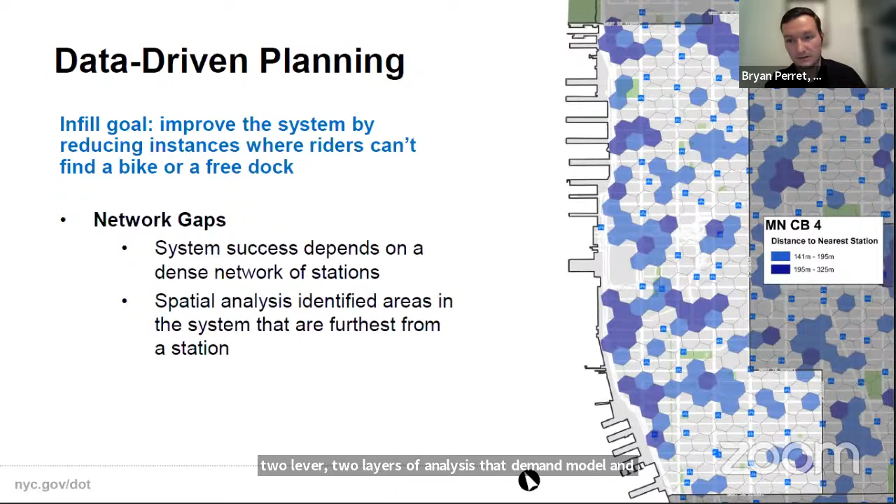Which kind of leads us to here, the results of this tool. So according to our model, Community Board 4 needs about 2,700 docks to meet the existing demand. We're here tonight to discuss a proposal to install just shy of 500 docks, 493. And that comes in a variety of forms. It'll be reinstalled stations, extending existing stations, and also adding new stations where it's found appropriate.

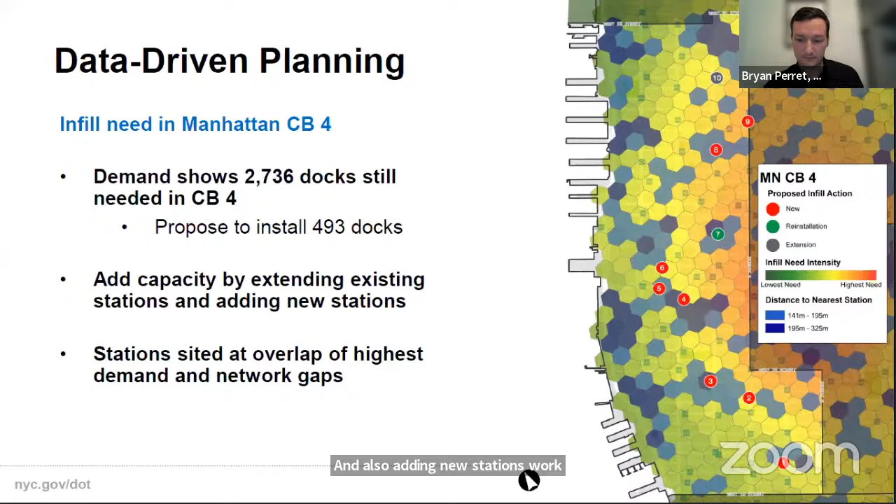So let me know if I'm moving too quick here, but I'm happy to take questions or specifics at the end.

So I'm happy to go through our list of sites here. Location number 1 is the south roadbed of West 17th Street at 7th Avenue. Location 2, 8th Avenue at West 23rd Street on the west roadbed. Location 3, the south side of 25th Street at 9th Avenue in the roadbed. Location 4 is West 33rd Street in the south roadbed at 10th Avenue.

Location 5, West 34th Street and Hudson Boulevard East in the south roadbed. 6, Hudson Boulevard East at West 36th Street in the east roadbed. And number 7, the north roadbed of West 39th Street at 9th Avenue.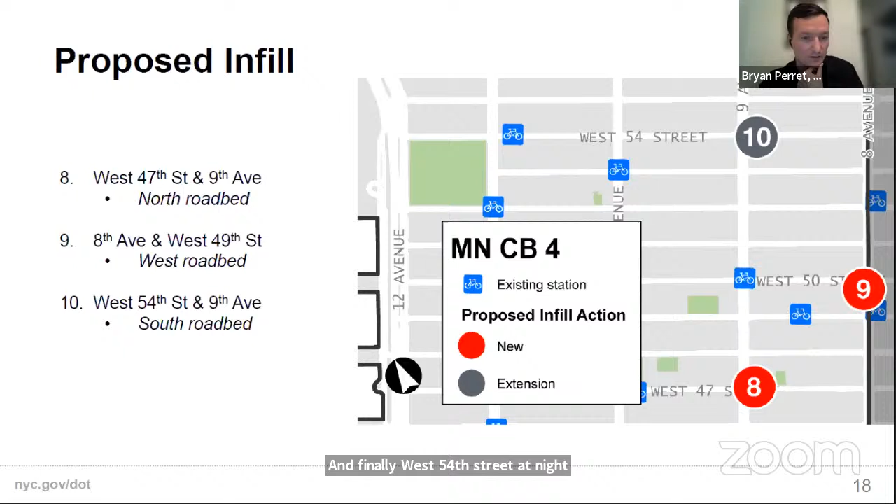Rounding it out with 8 through 10. Number 8, West 47th Street at 9th Avenue in the north roadbed. Number 9, 8th Avenue and West 49th Street in the west roadbed. And finally, West 54th Street at 9th Avenue in the south roadbed. That is a station extension.

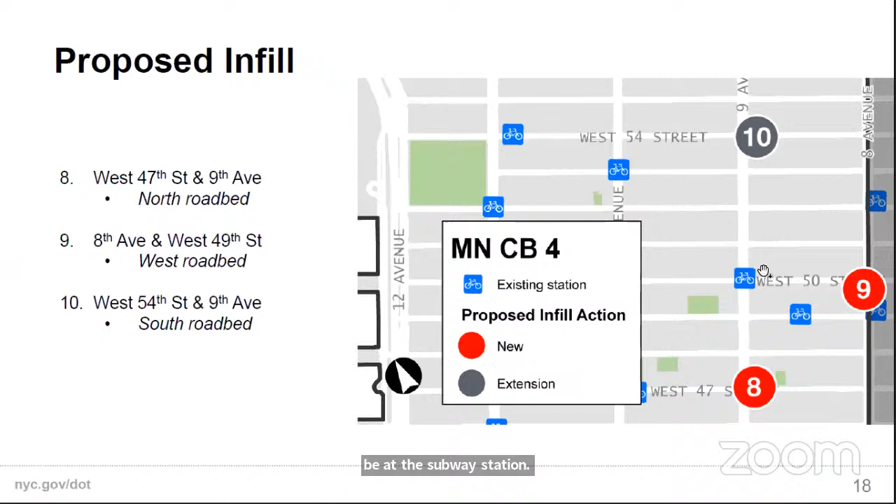Bryan, Rob, you have a question? Yeah. How do we go about getting a bike station on the southwest corner of 24th Street and 9th Avenue, right by the Gerstides? We've been asking for a while. We have to go at least 3-4 blocks over and either past 23rd or up to go to a bike. And by that time, we could already be at the subway station. I thought Citi Bike was actually for the last mile. I'm just asking, who do we need to talk to get a station put in?

Well, here we are, but can you show the next slide, Bryan? This one. So they are proposing to put one here at West 25th and 9th. It's not what you're talking about? No, it's a block up. I was hoping it could be a block down at 24th. It'd be the perfect space because it's right on the side of 24th Street where Gerstides is, and it would only take up like a parking spot. But is it at 8th or 9th?

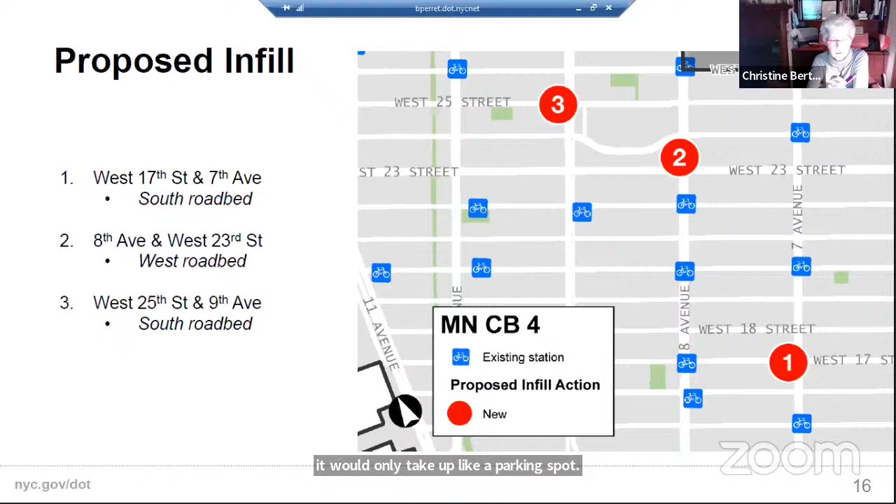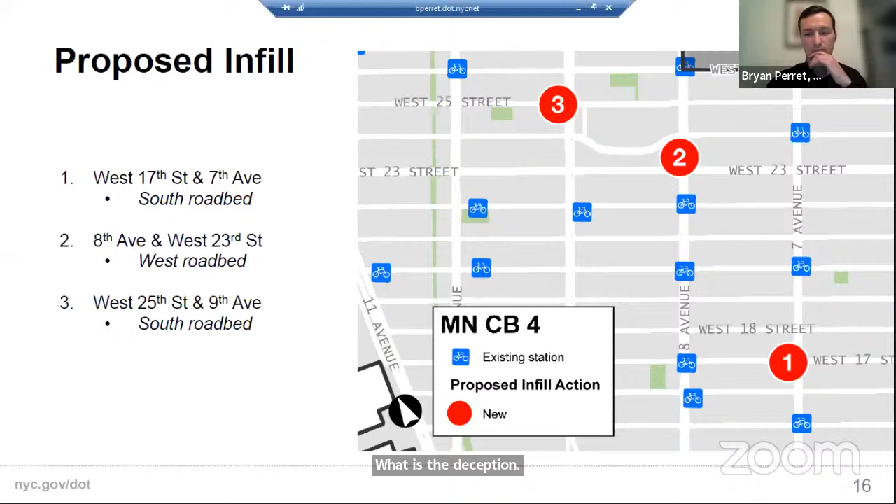This is at 9th. Okay, so it's 24th at 9th in the southwest roadbed. I can certainly take that back to my colleagues and take a look. Corner on 24th. It's right where the Gerstides is at 24th and 9th. What is the intersection, Rob? Excuse me? Yeah, can you repeat the intersection exactly? It's the southwest corner of 24th Street and 9th Avenue, but on 24th Street. It's right in front of, well, right on the side of Gerstides where the windows are.

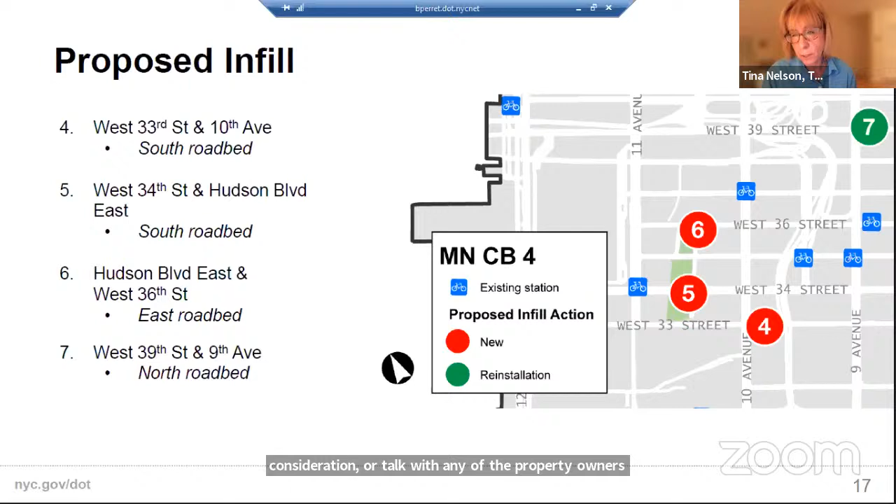Okay, I got it. Okay, next, Tina. I'm curious, when you decided where these locations went, given the fact there's open restaurants now, was there any consideration or talk with any of the property owners or restaurant owners when deciding where these installations go?

Yeah, I think we specifically took open restaurants into consideration and looked to make sure that we were not conflicting with any open restaurant structures.

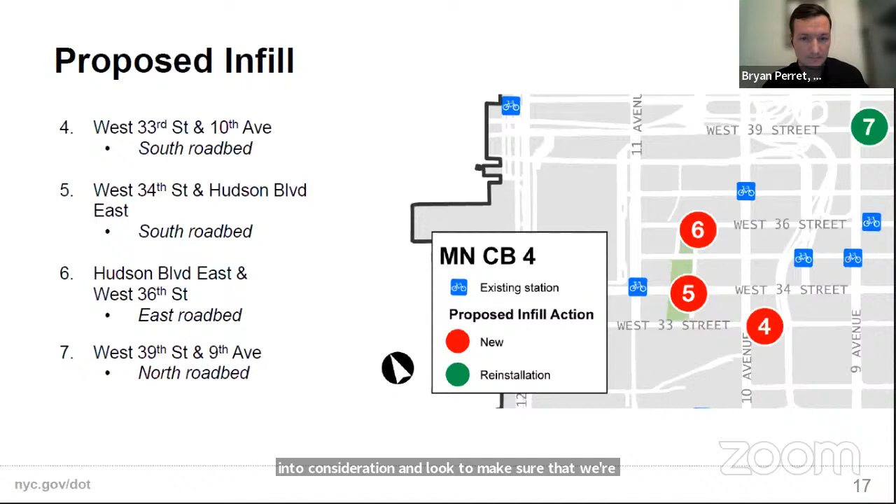Yeah, and it's Colleen from DOT, and we have done notification to property owners and businesses, letting them know that new stations are coming in the area. So we've done our notification and outreach as well.

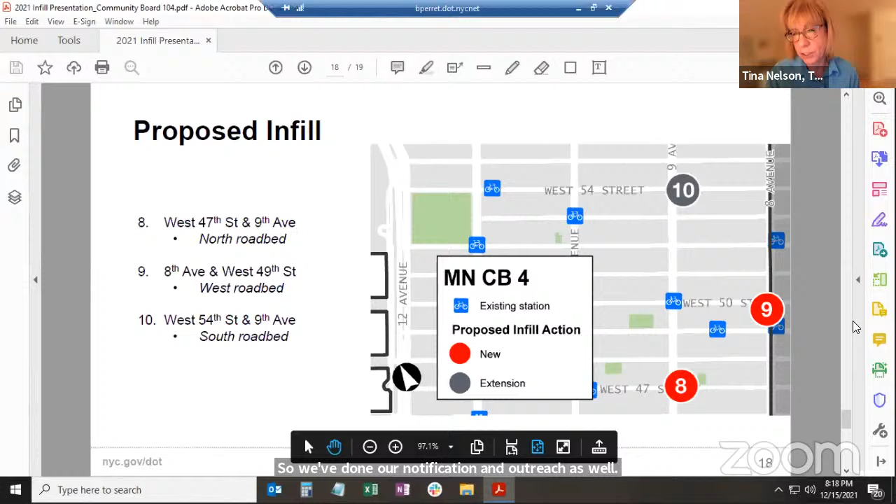So we could assume that these locations, the property owners or the restaurant owners, knew about it before this presentation took place. In other words, if anyone had any objection to a location and said please move it down the block, where would that comment or concern go?

Well, yeah, we've created a flyer that we shared with the community board, and we shared the flyer with the elected officials, letting them know that we would be presenting this to the CB4 Transportation Committee meeting this evening. So we've done a lot of outreach on this.

Right, so typically we'll come to the board first, and then as we move forward with the installation process, we'll notify properties prior to installation. That gives them the opportunity to raise any concerns, or we can work with them about any specific operational issues they might have.

Jeffrey? Thank you. Just so, is the reason we're only getting, was it 493, about 500 docks, and yet the need is 2,700? Is that because Citi Bike doesn't have enough docks to meet that demand right now?

I don't think so, well, specifically in the next year, that's what we plan for equipment-wise. But again, this is an iterative process. We're going to go forward with these installs and take a look and see how the system responds, and look to find additional space as we can in the next couple of years. This phase 3 infill process is going to last until about 2024.

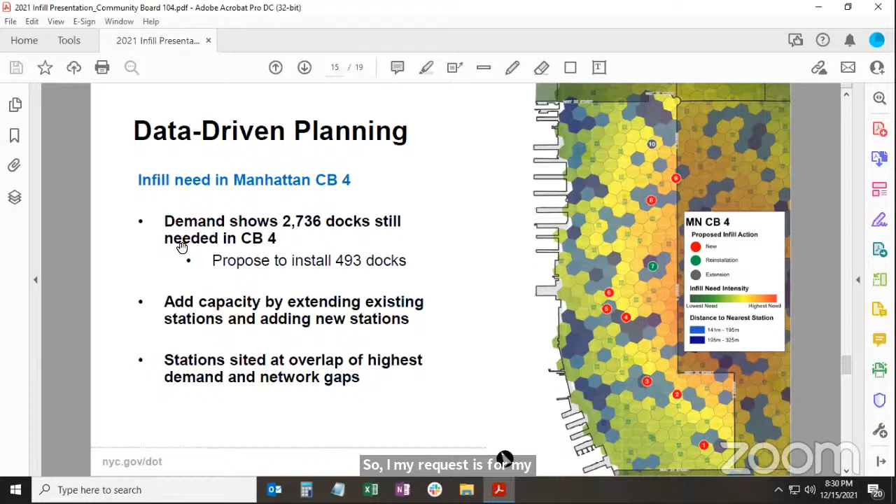So my request is for my members, my customers, and our growing Chelsea Piers community, because we're just one of the many businesses over at Chelsea Piers, to get a Citi Bike station over on the West Side Highway, because it will eliminate that 12-minute commute back from one of the stations.

Something to think about is you're not just walking across to the cobblestone roadway parallel to the West Side Highway. You're walking through a whole garage to get to our entrance. It adds extra time, and it would help our business.

It would help the community. It would help people who want to come over and check out all of the really amazing things our complex has to offer, if there was a way to make it more accessible to everyone. Over the summer and fall, we saw so many people just roaming around the complex. We did a Pilates mat class over at Pier 62 and had an average of 80 people every Saturday morning coming to take a class with us.

If we gave all of the people who come to that area on a daily, weekly basis the tools to get there easier, then you're going to see more people come over and utilize the West Side Highway, which everybody wants right now, green space, the outdoors. So my request is, what can we do to help move this along? Has anything been written to HRPT about that?

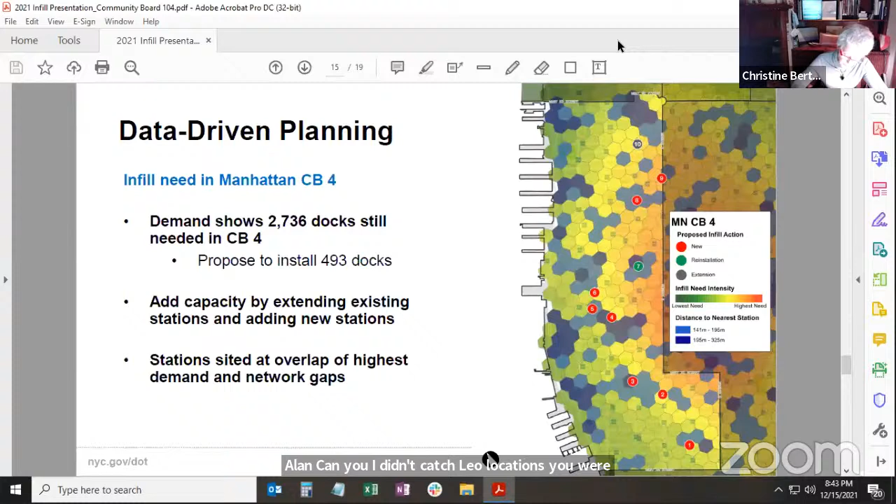Alan, I didn't catch the locations you were asking, 20th and the highway? Well, I believe from the map, there was a large bike rack on 20th off the corner of the highway. They removed it for some reason, and installed the bike rack on the other side of 10th by the hotel. So I think the map shows that that's being replaced, so that's a good thing.

There was also a bike rack on 22nd Street that was removed to allow construction because they had to cut the street down when Related was putting up the building. So, 22nd off the highway, 11th, let's call it 11th. And so what are you saying, you want that back? I think it's a perfect spot, you know. Okay, all right, I just want to clarify.

And then the cleaning, I think the idea of the trash can is great. And if we wanted to do some additional, more intense cleaning, would that be below 34th or everywhere? Below. Yeah, it would be interesting to know what the protocol is. What is Lyft expected to do in terms of maintaining these bike racks? What is part of the contract?

So actually, they're required to visit twice a month for cleaning each station. Well, I will say I have noticed them recently, so maybe someone got on their back about it, but for a long time there was nothing happening. So, all right, I'll add that and mention that perhaps a trash can here and there alongside the bike racks would certainly help, you know.

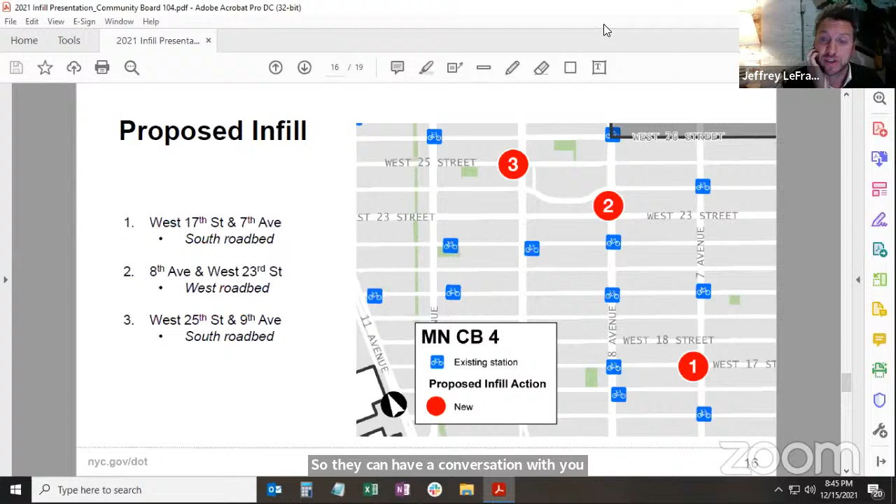I just have one more comment, Christine, and I'll make the resolution: please also note, suggest that DOT talk to the Hudson River Park Advisory Council, so they can have a conversation with the advisory council to the trust and consider the park as a whole, not just by district.

Yeah, we can include that, that's a good suggestion. We can include that in the language that outlines an approach to the park broadly, and then get into specific recommendations in the meantime.

Would it also be appropriate to put in increasing the percentage of electric bikes, or should we wait for another time? I'll go with whatever the committee feels. I think it's off topic. It's okay, not on topic.

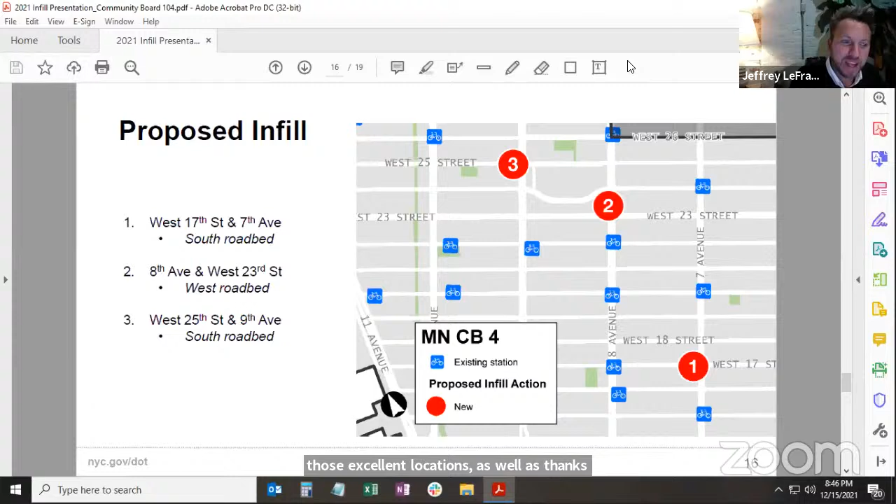Okay, so Jeffrey, you promised to make this. I will wrap all of those excellent locations, as well as the new stuff and recommendations to move forward, into a motion. Second. Second.

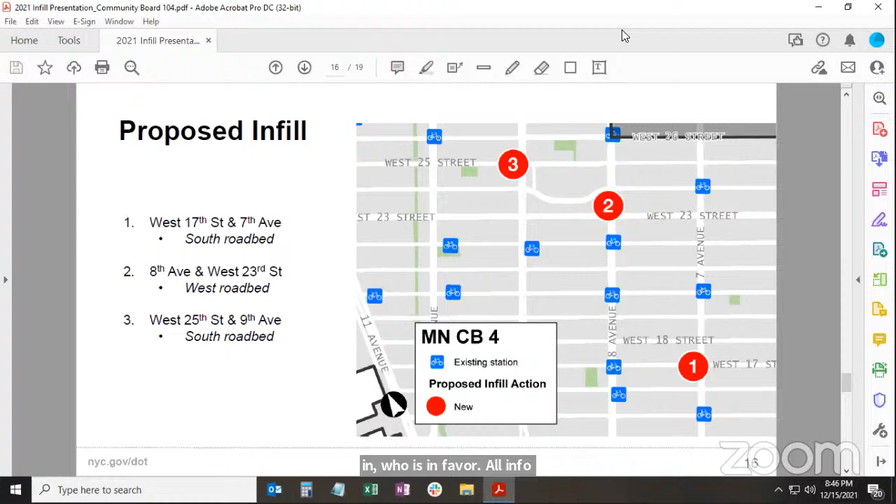Who is in favor? All in favor? Aye. Aye. Anybody opposed? Present, non-eligible? And that's a wrap. Thank you so much.

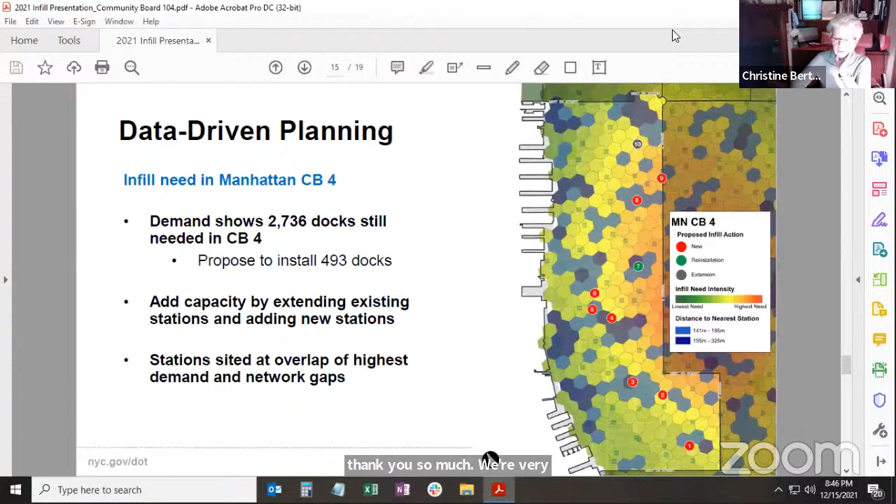Okay, take a deep breath.

And we have the next guest or applicant, who is supposed to be DoorDash Dashmart, which is going to start a delivery site at West 25th Street. So Janine, did they finally decide whether they were coming or not?

You're on mute, I'm sorry. They won't be presenting tonight, but they welcome any feedback or anything the committee has for tonight. And do we have the representative of the delivery people? Hildeline is on. Okay, let me just give a very quick summary before we get into that.

So DoorDash, the delivery organization, has just started a new business called Dashmart. This is similar to many other businesses offering 15-minute deliveries of your groceries. Typically what they do is take a store, obscure the front window, take deliveries online, and hire delivery personnel to deliver in less than 15 minutes. That new DoorDash location is going to be on 25th Street.